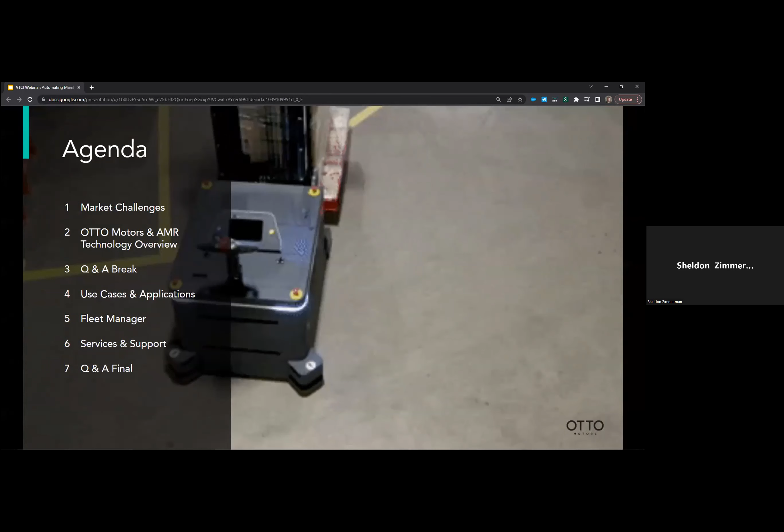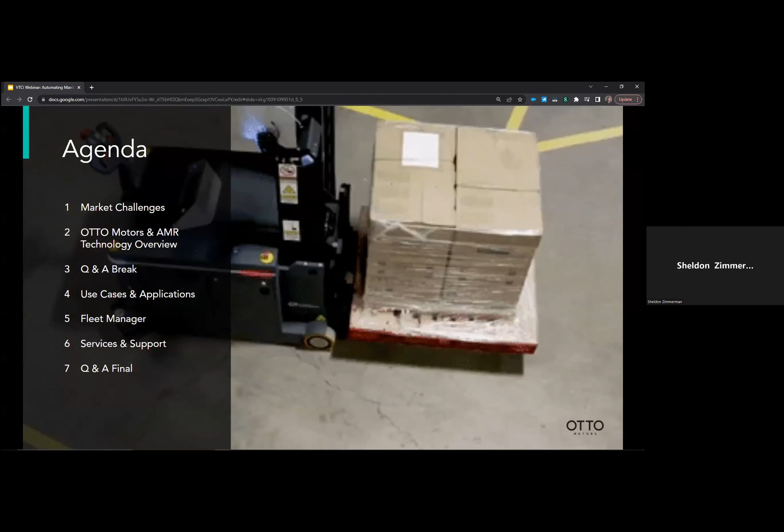Just a quick overview of the agenda we want to go through for the presentation. We want to provide an overview of the market challenges that the heavy equipment and vehicle manufacturers of Manitoba are facing, so we'll start off with that. We then dive into the OTTO Motors technology offering and give you a thorough overview of our AMRs, our autonomous mobile robots. We'll then break for a Q&A period with Jay. Following that first Q&A, we're going to showcase some real-life applications of our AMRs at work with end users in the manufacturing space. We'll provide an overview of the software that powers our robots, known as Fleet Manager, and we want to dive into the power of that software offering. Next, we'll go over the service and support offerings we offer for your deployments. And then again, we'll do a final Q&A period.

So just starting to talk about the market challenges. Canada's labor shortage problem is evident. When you look at heavy vehicle manufacturing in Manitoba, it represents 11% and accounts for $1.5 billion in annual exports, so the industry is strong. However, there are labor shortages, late fees, and delayed capital investments. In fact, Canadian Manufacturers and Exporters, CME, has put a number on worker shortages of $13 billion. That's how much the current labor shortages are costing the industry across the country in the last year alone. The CME came to that total extrapolating from a recent survey of its members on labor force issues. It comes from lost orders because companies don't have the workforce capacity to take on more work.

And from costs that they have to pay for expediting to deliver when things show up late. Jill Nags, an official with CME Manitoba, said there's no reason to think Manitoba manufacturers are not bearing a proportionate share of that $13 billion that's being left on the table in the past year. It's been the number one concern for Manitoba members for a few years now, she said.

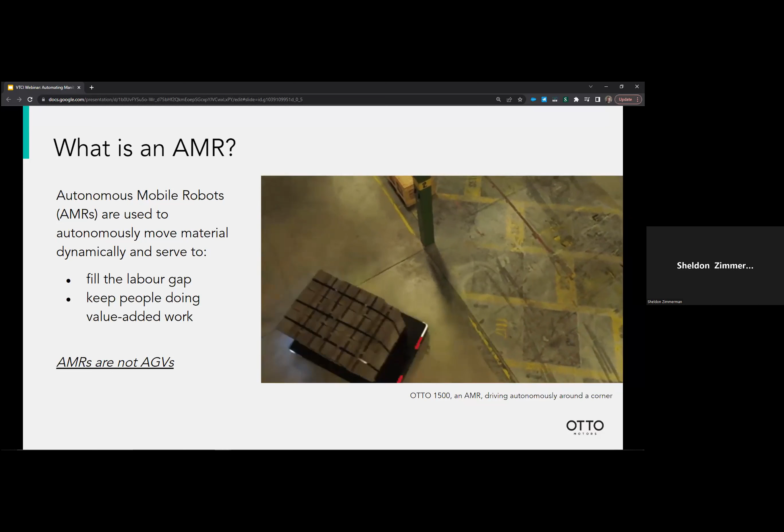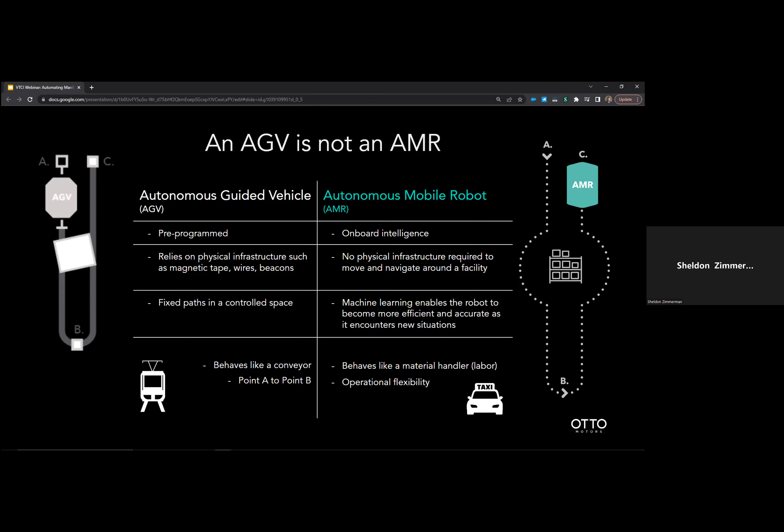So we, as mentioned, are a Canadian company. We're a leading provider of autonomous mobile robots.

Recently, it was announced that the company had been named as a member of Team True North. Team True North is a proactive data-based initiative by Communitech. It serves to identify the country's highest potential tech companies and strengthen the entire Canadian tech ecosystem. Companies recognized as part of Team True North represent the top 1% of Canada's highest performing global private companies.

Just a quick quote from our CEO and co-founder, Matt Rendall, who you'll hear from later in the presentation: 'We're honored to be named to Team True North and to be the only robotics company on the list for 2022. In the past few years, we've seen automation transition from a tactical initiative to a strategic one. This recognition by Communitech speaks to the growing importance of automation. We're proud to be among this year's winners and help keep the economic wheels turning in Canada and around the world.'

So OTTO is quickly becoming one of the largest indoor logistics operators in the world. If you think about a typical forklift driver with, say, 20 years of experience, they have approximately 42,000 hours of driving experience on your forklift. Each of our AMRs has the collective experience of 4 million hours in a production environment in mission critical operations. So every one of our AMRs benefits from the experience of every other AMR out in the world.

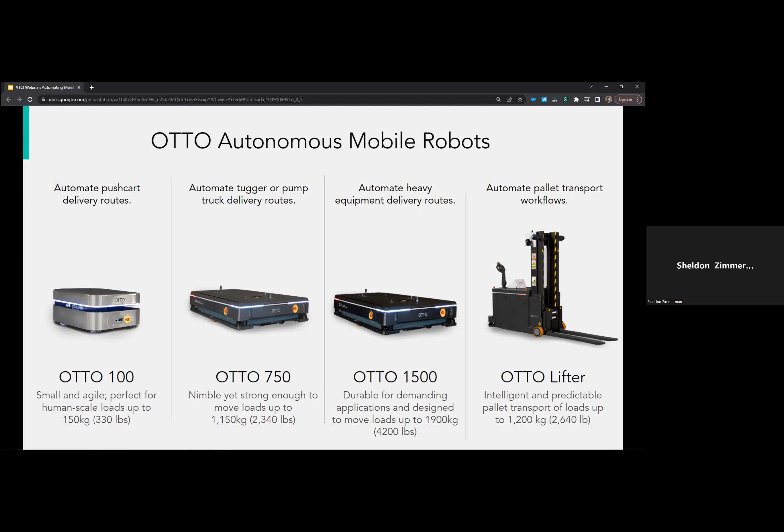Just to key in on the forklift itself, we consider it the smartest autonomous forklift in the industry. It has intelligent pallet detection for skewed, off-centered pallets and stretch wrap covered entry notches.

It has one-touch autonomous lane clearing, which I'll show you in a video in a second. It utilizes what we call adaptive field set technology, which maximizes your speed while maintaining safety in the facility. Of course, it utilizes the same single fleet management system that all of our vehicles use, so they all run on one software platform, and it continuously remaps zones for dynamic environments.

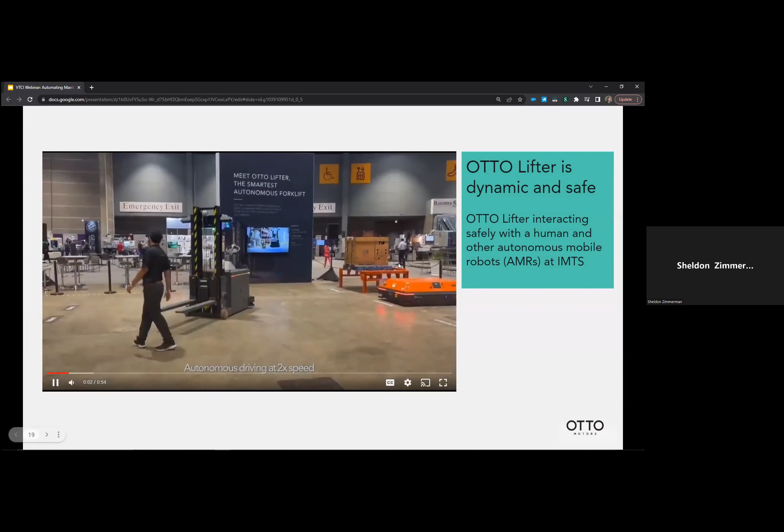This is an example. I'm just going to let it play and narrate it. There's no audio to it. This is Omar, at the IMTS show we were at recently in September of 2022 in Chicago.

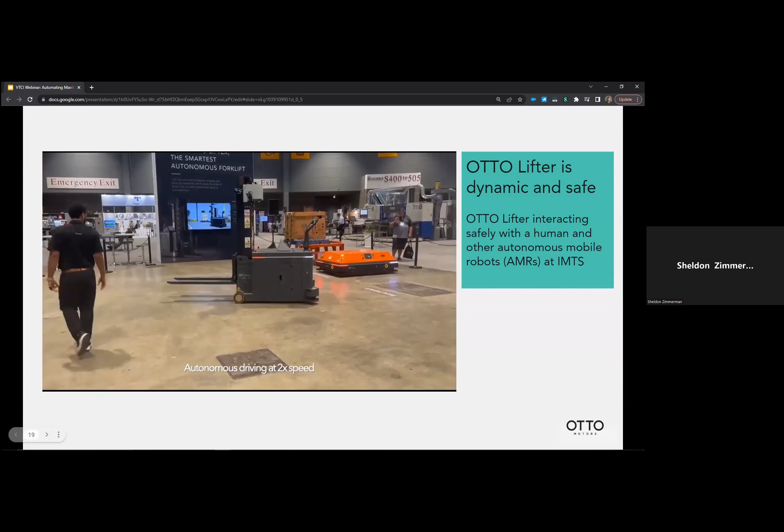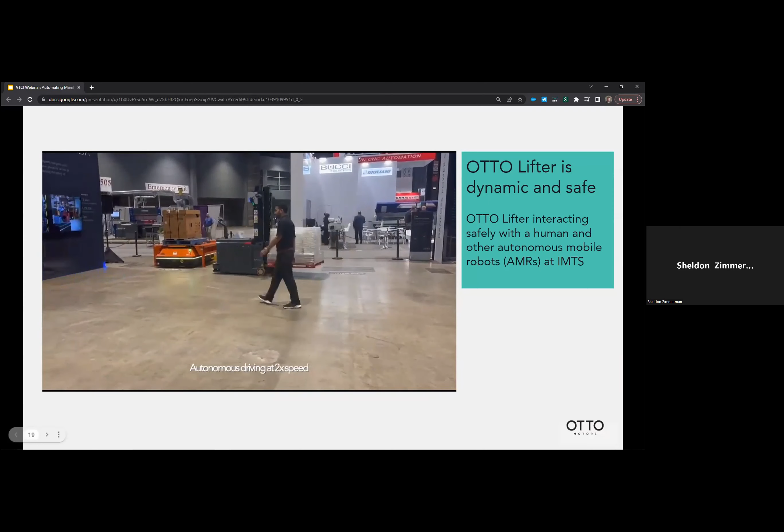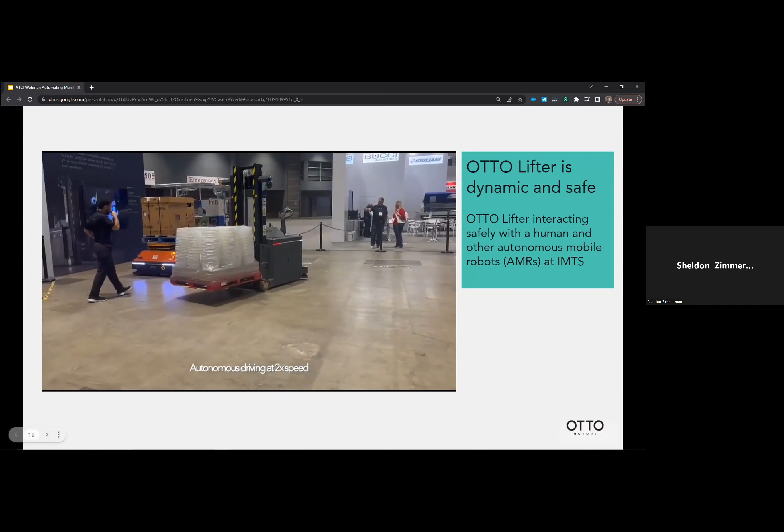This is showing the safety and the ease and comfort of Omar as he walks around the robots and amongst the fleet. You'll see an interaction between the lifter and our OTTO 1500, which is in the background there. This really showcases how comfortable it is to be around these robots and some of the re-navigation the robots do to get around obstacles or people in your facility. In a second, he's going to walk right through the middle, between the two vehicles, which are always monitoring the obstacles in their way and trying to find an efficient method to get around them.

I think that one's powerful. I want to talk a little bit about it, because we set up these trade shows in 2 days, and we feel comfortable enough with our technology to bring it into a trade show, set it up on the floor, and have our people, or even people within the trade show, come inside the fence lines, walk around the technology, and be safe. I think that speaks to the trust we have in our product, putting it out there on the floor within a short period of time.

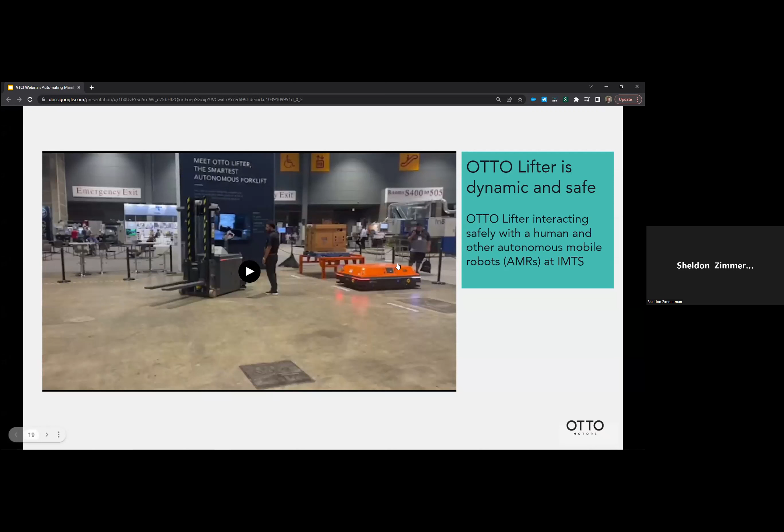Awesome, awesome. So we have one question that came up, feel free to submit more. Joshua asks: you claim the forklift robot will continue to do its task until it's physically constrained from doing so. How does this affect the collaborative ability of working in and around these robots? How can you ensure the robot will not collide with plant workers? I think that video you just showed illustrated that well, but Jay, you had a couple of comments you wanted to make.

Yeah, absolutely. That couldn't have been timed better, the question coming on the last slide before Q&A. I think that video is important because anything I tell you is going to sound reasonable, but the reason you should believe me is because we did video, right? There were 100,000 people at that show, and if anything had gone wrong it would have been quite reputationally damaging. So that shows the trust that we have, and the trust that Omar had. You look at the smile on his face as he was doing what he was doing.

But as for the technology, how we get it done, basically the key ingredient is a LiDAR, a laser scanner essentially that works out on a plane. It sprays laser all over, finds out where things are, and the closer it gets to things, it either slows down or stops. So if it sees something far in the distance, it might go fast. If it sees it closer, it'll slow down, and if it gets too close, it stops.

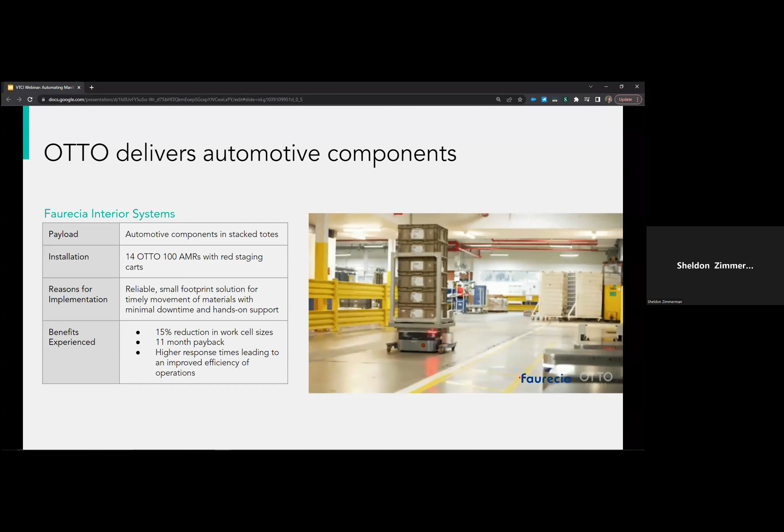So the first is bringing materials to and from people. This is a real life example of a tier 1 automotive supplier in Michigan, Faurecia. You may have heard of them. They wanted to move automotive components in stacked totes.

You can see a quick GIF file of that movement, but I'm going to show you a more comprehensive case study video we did with them. They took on 14 OTTO 100 AMRs with staging carts. It says red, they're actually gray.

What they were looking for was a reliable, small footprint solution for the timely movement of their materials, with minimal downtime and minimal hands-on support. What they experienced, and what they'll tell you in the video, is they were able to reduce the work cell sizes, gaining back about 15% of floor space in their facility. They achieved an 11-month ROI on the deployment, and higher response times, leading to improved efficiency for their operations.

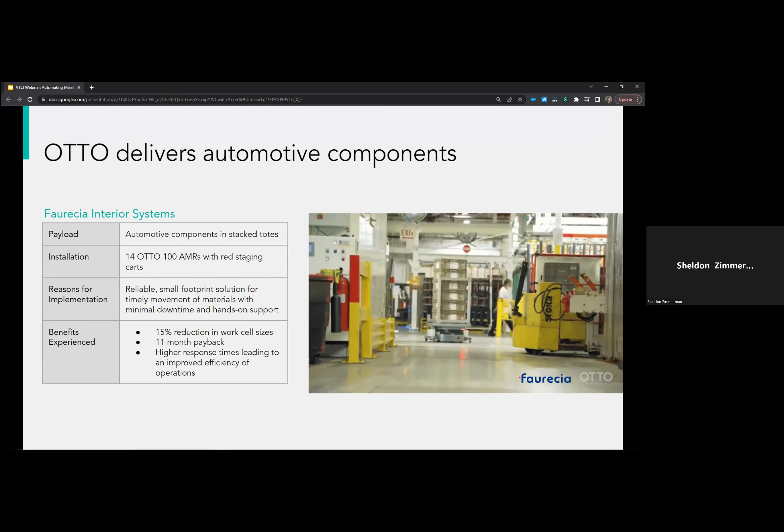So I'm going to let the video play. Again, it's Faurecia in Michigan, and they can tell the story better than I can.

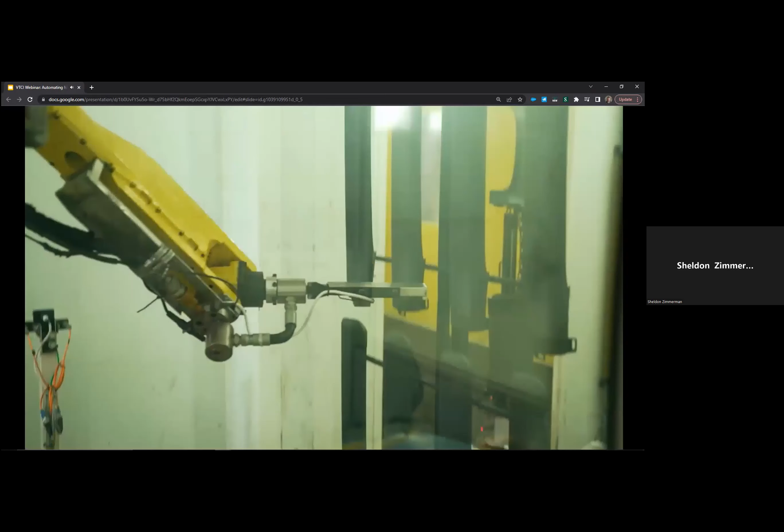Faurecia is a leader in automation and cutting-edge technology. We do automotive components, instrument panels, consoles, door panels for Ford, GM, and Chrysler, also BMW, Rivian, and Volvo.

With the COVID restrictions going on and people having problems getting to work, we're trying to automate some of the processes so we can reduce our people workload and function as a plant even in these trying times. We have 8 OTTO 100s with gray carts, and we will be receiving 4 more in the future.

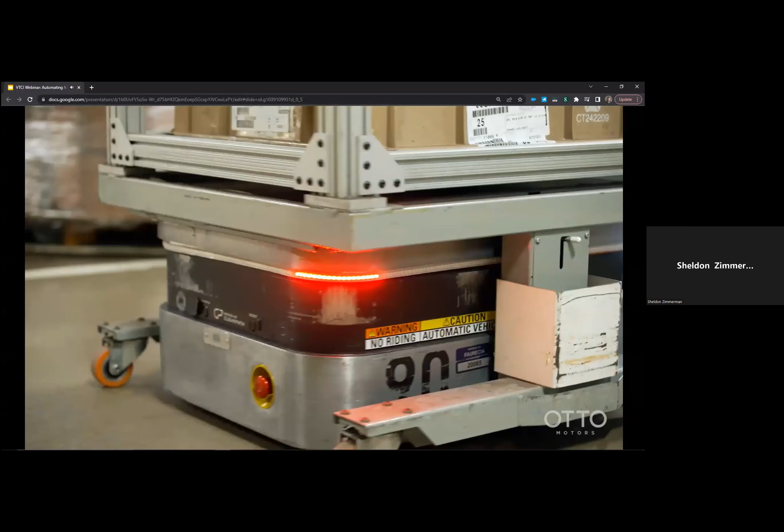It's happened once or twice here at Faurecia where the OTTO has accidentally been hit by a tugger or a high-low. The OTTOs are so robust that if it does take a hit from a high-low or a tugger, it is quick to reroute and complete the mission.

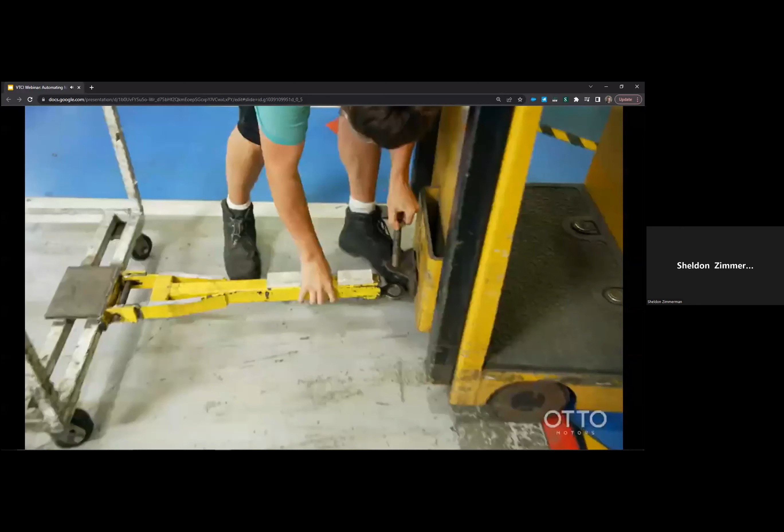One of the basic problems we're trying to solve is the material movement between the work cell and the warehouse. The OTTO fit exactly what we needed it to do, where it can pick its own path, where it doesn't need a magnetic strip. I was in charge of bringing OTTOs into the plant. I spent countless hours looking for someone to meet the footprint required by our corporate personnel, and OTTO stood out.

Overall, it just needed to be a self-sufficient system. OTTO allows us to reduce our tugger drivers and high-low drivers, utilizing the manpower in a much more efficient way. The role the Autos play: once the operator is done stacking their totes, they turn around, call the OTTO with the tablet. The OTTO will then deliver the parts from Tech Bay over to our shipping warehouse, dropping off a gray cart and picking up an empty gray cart, then bringing it back up to Tech Bay.

The OTTOs have safety features that allow them to coexist with both a tugger, an operator, and people crossing its path. We've been running the OTTOs for about a year and a half. We've had zero safety incidents. We have a pretty big facility, so I can't visually see all 8 OTTOs at all times.

In Fleet Manager, I'm able to see where the OTTO is, how long it's taking, but also things change in our plant all the time. I'm able to assist with remapping certain areas, put in an eraser zone, put in another zone, put in new routes. We wanted something that was totally flexible, and OTTO gave us that ability. In fact, we moved a couple of cells in the plant a couple weeks ago, and within 45 minutes we had a new parking lot and a new route for the OTTOs.

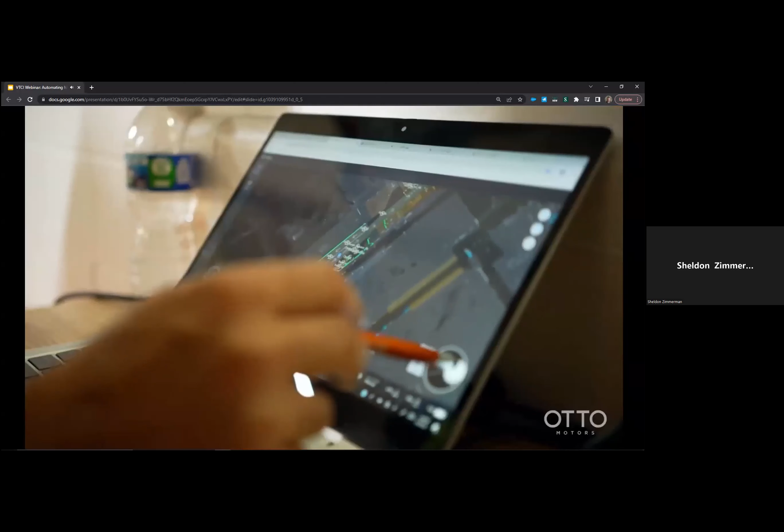We've run over 15,000 miles with the OTTO fleet over the last year, and they operate 24 hours a day, 7 days a week. They don't take breaks, nor do they show up late for work or get sick. We've only had very few downtime issues with the OTTO fleet itself. Our return on investment for the OTTOs is about 11 months. We can utilize our workforce in a much more efficient way.

The operators absolutely like the OTTOs, hands down. They actually prefer OTTOs to the old delivery way. It's really a no-brainer. We are expanding the fleet due to being noticed for efficiency gains. OTTO delivers safety, productivity, and efficiency at scale.

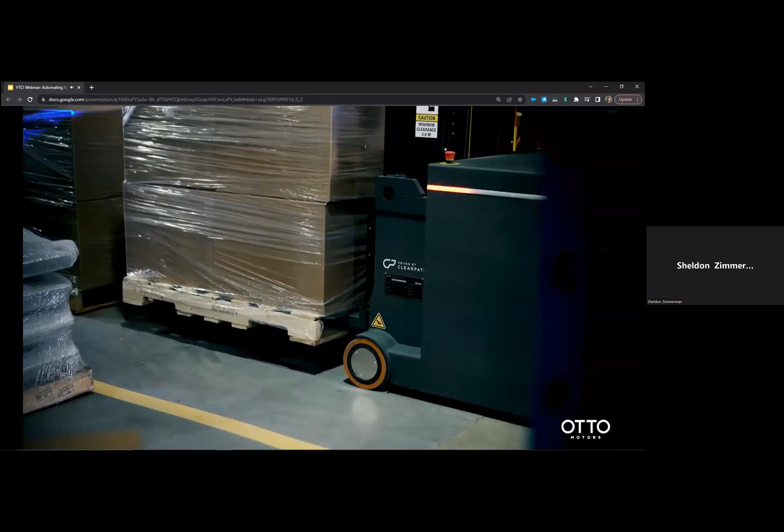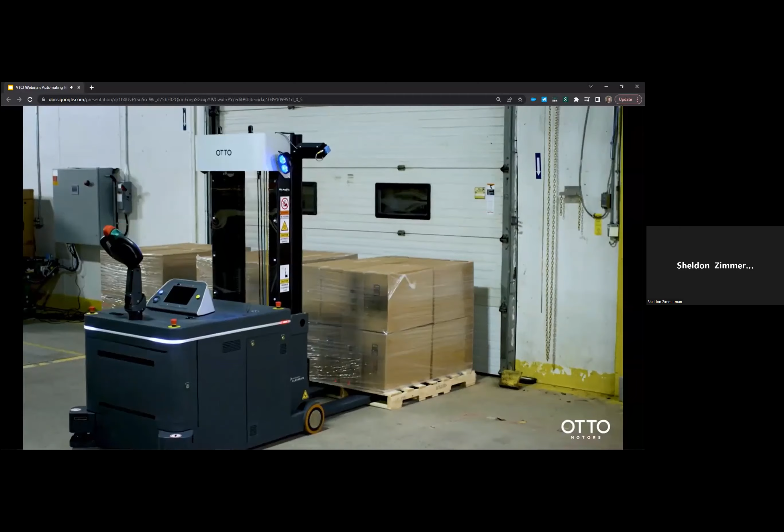Okay, so just moving on to the next type of material, we're going to look at bringing materials to and from racks and stands. The next couple of videos highlight our autonomous forklift, again known as OTTO Lifter. The first one highlights our ability to quickly and efficiently perform lane clearing. This next video is going to be stand-to-floor workflows, again with the lifter, just showcasing its capabilities.

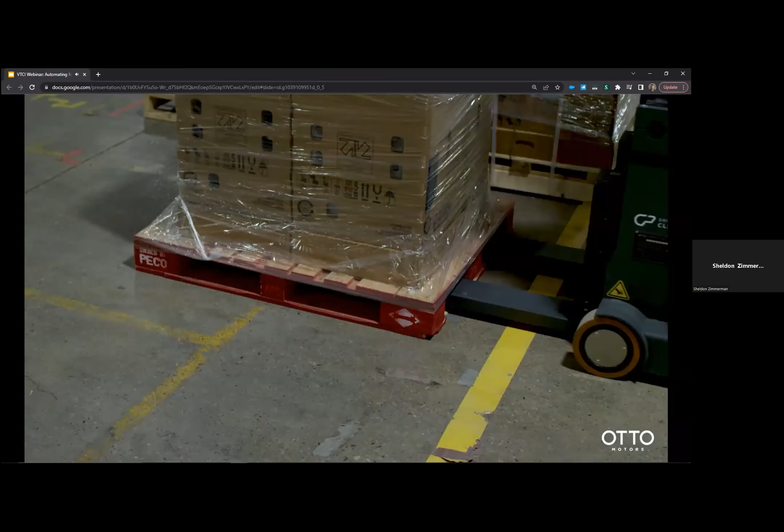So the next type of movement we're going to look at is bringing materials to and from automation equipment. This is linking up islands of automation within your facility.

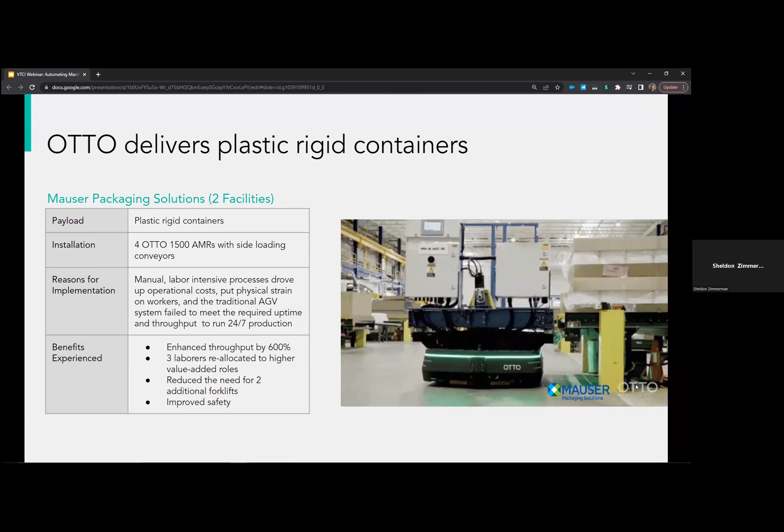First case study that we want to showcase is with Mauser Packaging. There are 2 facilities, one in Langley, British Columbia, and another in Oakville, Ontario. The payload that we were moving is rigid plastic containers. We installed 4 OTTO 1500s with side loading conveyors.

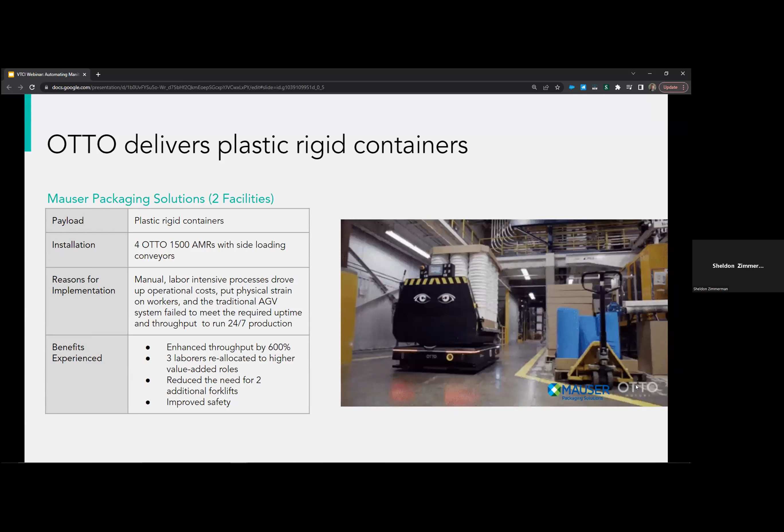The reasons they were looking to implement this: manual labor intensive processes drove up their operational costs, it put physical strain on their workers, and the traditional AGV system was failing to meet the required uptime and throughput to run their 24/7 operation. What they experienced was an efficiency throughput increase of 600%. They had 3 laborers reallocated to higher value-added roles, and they reduced the need for 2 additional forklifts, of course improving safety at the same time.

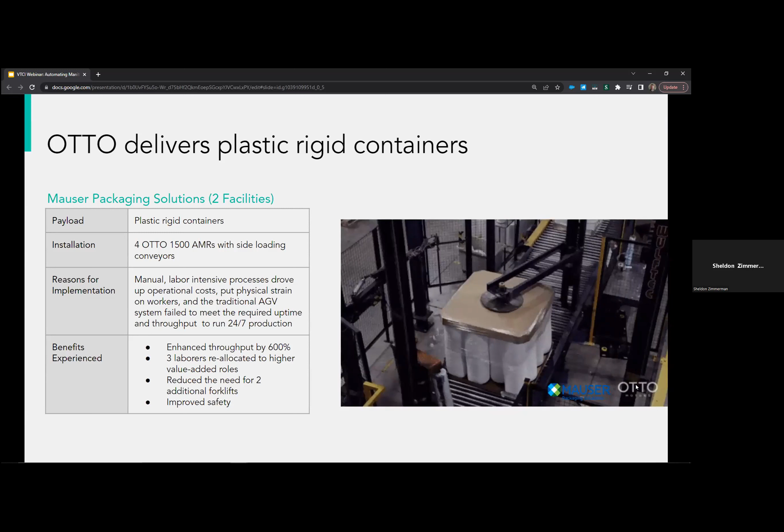So the next video is going to highlight that installation.

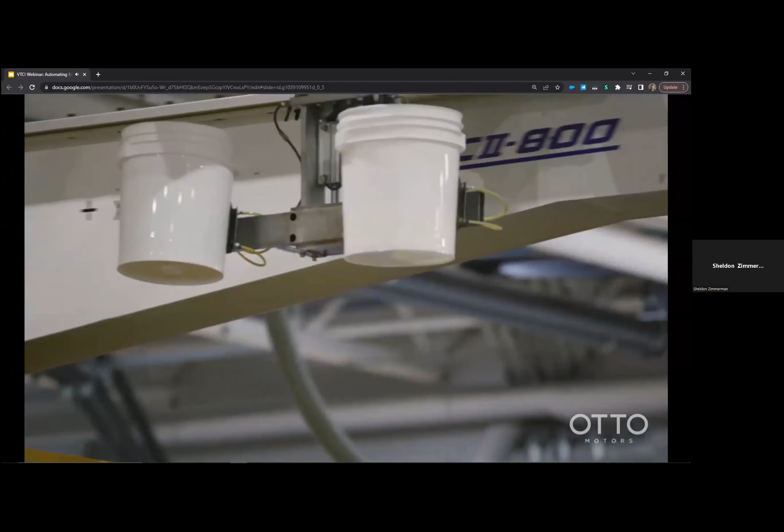Mauser values innovation because they want to be the leader in the plastics manufacturing industry. We manufacture pails and lids from 1 gallon to 13 gallon. We service a lot of different industries, like Stahlbush and Saputo, big customers that put a lot of food product into the pails.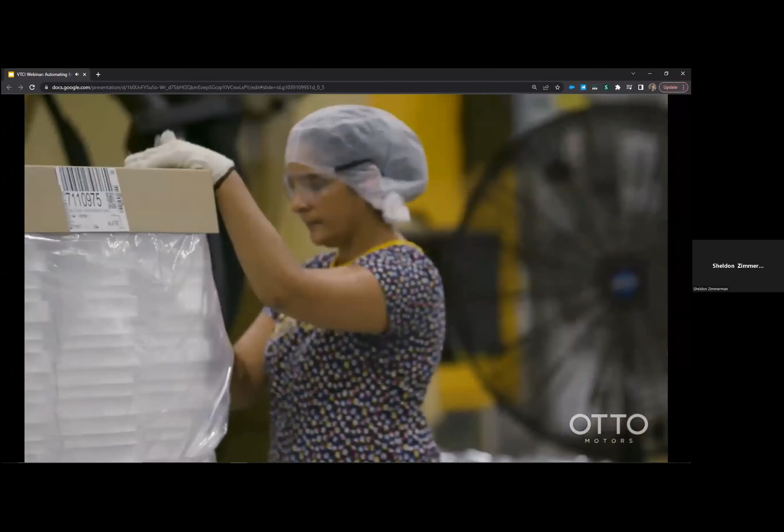This facility is about 206,000 square feet, and we have 140 people working right now. OTTO came into our mind because of the safety concerns that we had in the past. Finding people was very difficult because we were a 24/7 operation.

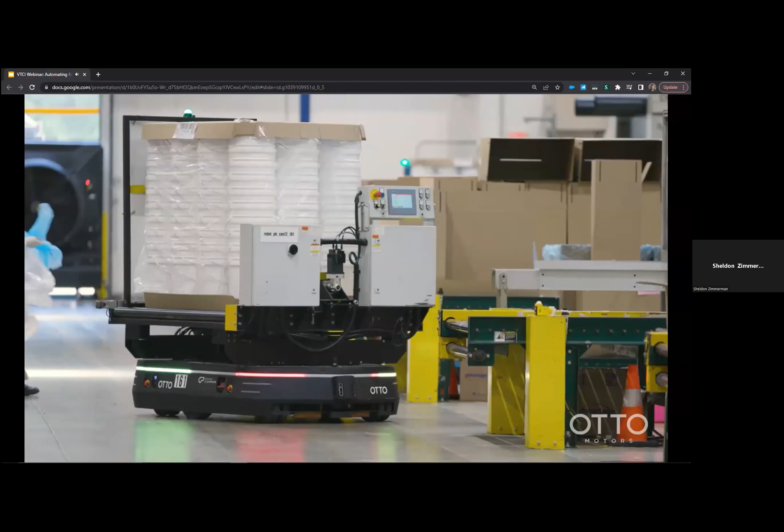When OTTO was first introduced to the Langley facility, it was the first step for us to get into something probably nobody's ever done before. The OTTO arrives to the station, connects with the pack station and transfers the package onto it, and then drives back to the drop-off station where it transfers onto the wrapper-strapper line.

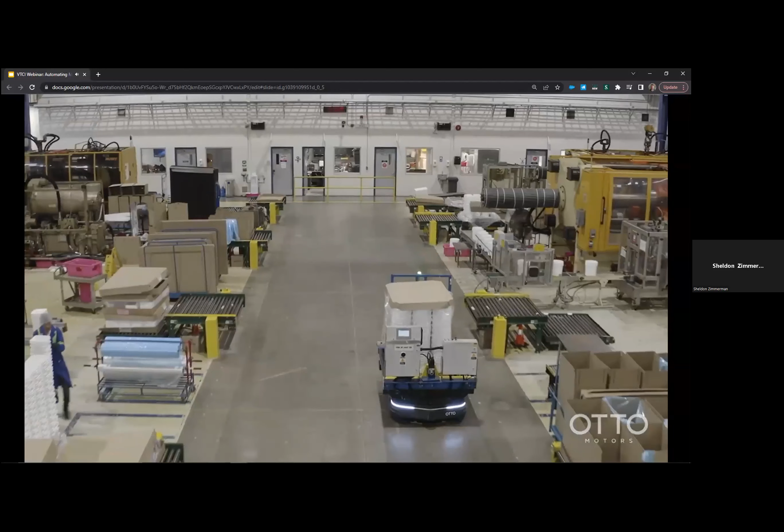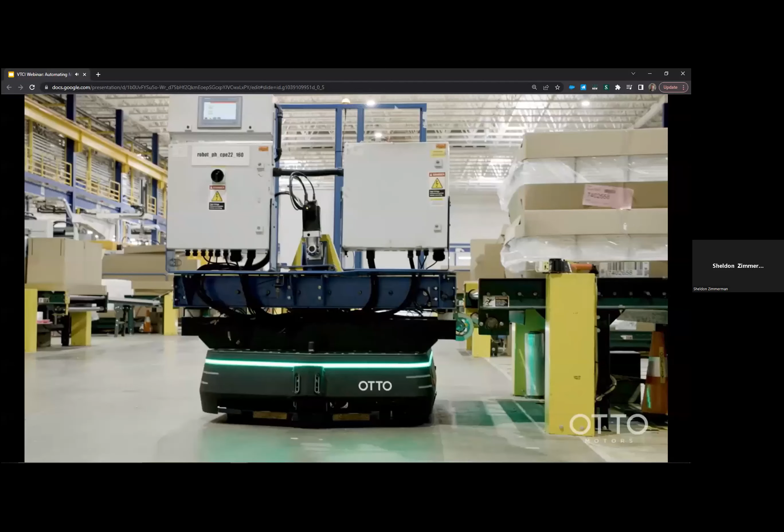When we introduced the OTTOs, we didn't have to worry about people getting hurt. For the last few years, it became apparent to us how important that was. The job OTTO's doing right now is basically the work of 3 people, plus at least 2 more forklifts. It definitely helps us out to have that money spent somewhere else.

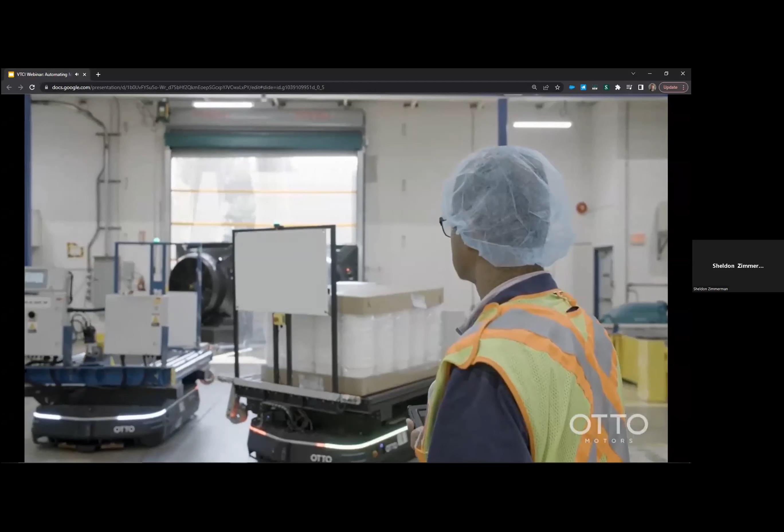I was pleasantly surprised working with the OTTOs. Such an easy system to work with. Myself, I'm not that technical minded and don't work with computers too much, but I found that this system was easy to understand and navigate through.

Because the units work so well here in Langley, they decided to expand that and bring the OTTO units into our Oakville plant in 2021.

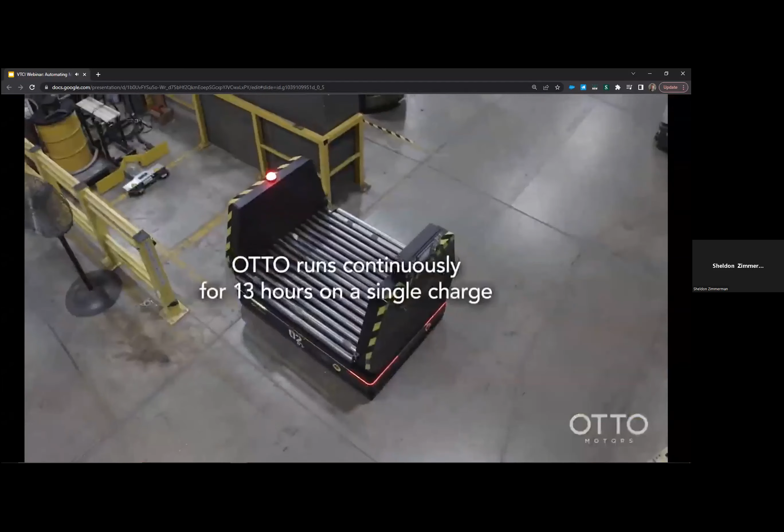OTTO delivers safety, reliability, and productivity at Mauser, 24/7.

Next case study I wanted to showcase for you all was more of a heavy payload application. This one is Sunview patio doors. You can see on the right the video file showing us moving 8 patio doors. Again, the footprint of the payload can be larger than the vehicle itself. It doesn't have to stay within the footprint. This is an example of where Jay had mentioned earlier that we can set up custom safety field sets so that it then virtually sees itself as larger than it actually is.

This was a single OTTO 1500 AMR integrated into their facility in Mississauga, Ontario with an integrated lift. They needed a flexible solution that would help transform their production to a lean manufacturing model, and it was necessary to increase safety and keep up with their evolving market, which required lower price points, faster delivery times, and more customizable products.

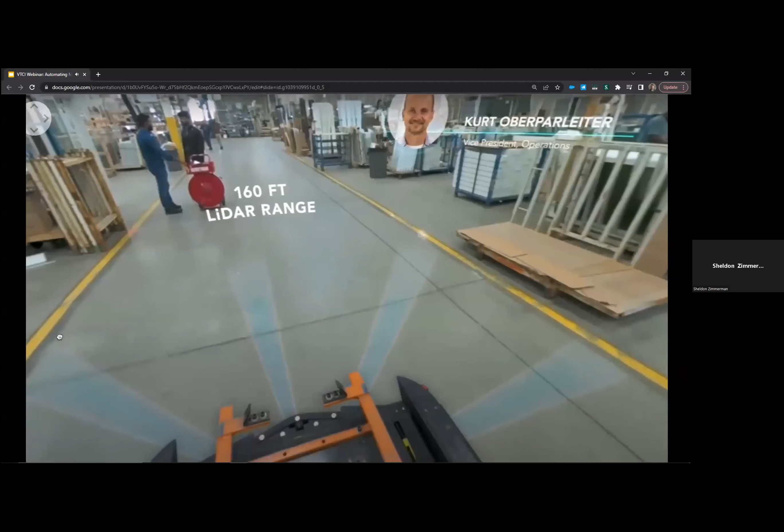I'm Kurt Oberparleiter, the VP of Operations. As OTTO drives, it uses LiDAR sensors and stereo cameras to map its surroundings, detect how far away objects are, and replan paths so it can safely navigate around obstacles autonomously.

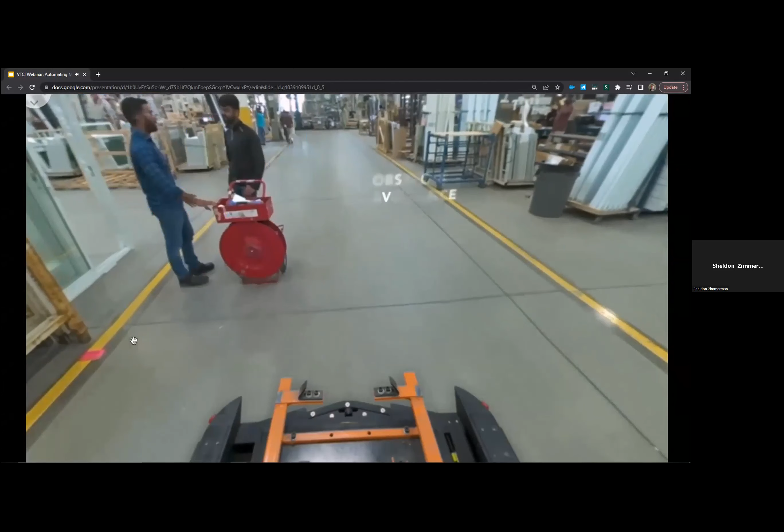As you can see, Maunick and Harris are blocking OTTO's path. Let's watch how OTTO navigates around them. Even if Maunick jumped right in front of OTTO, I have no concerns about a collision because OTTO is smart enough to react, just like a human would in the same situation.

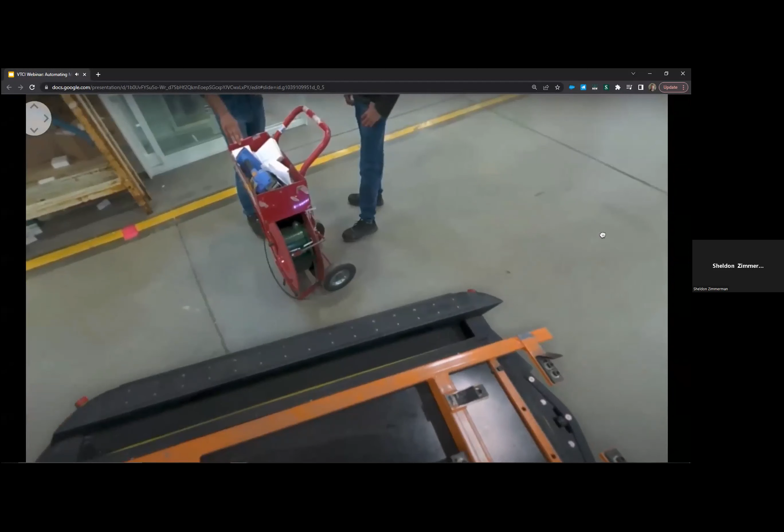Millions of laser beams are projected 160 feet in front of OTTO, which form a detailed image of the environment in which it is driving. This is one of the ways OTTO ensures it will continue to reach its destination in the most efficient manner, without the need for magnetic strips or other infrastructure to guide it.

So just a quick video to highlight the safety improvements and safety aspects that Sunview was... oh, that was not what I meant to do, that they were looking for. Goes to the current slide. Good, apologize for that.

Okay, so we're on to the next part of the presentation, which really focuses on our OTTO Fleet Manager offering and our software. OTTO Fleet Manager is our enterprise scale AMR fleet management software. It's meant to manage your fleet of OTTO AMRs, and it's the smartest and most scalable fleet management software for your material movement in the facility.

It applies custom traffic rules to your facility, and lets Fleet Manager enforce them across your fleet, while a built-in job scheduler automatically assigns jobs in a way that maximizes robot utilization and material throughput always. It's flexible enough to easily integrate with your existing mission-critical factory tools and systems, and PLC ready to collaborate with your smart factory equipment. OTTO Fleet Manager is designed to help you get started with material handling automation or go full enterprise scale across your entire operation.

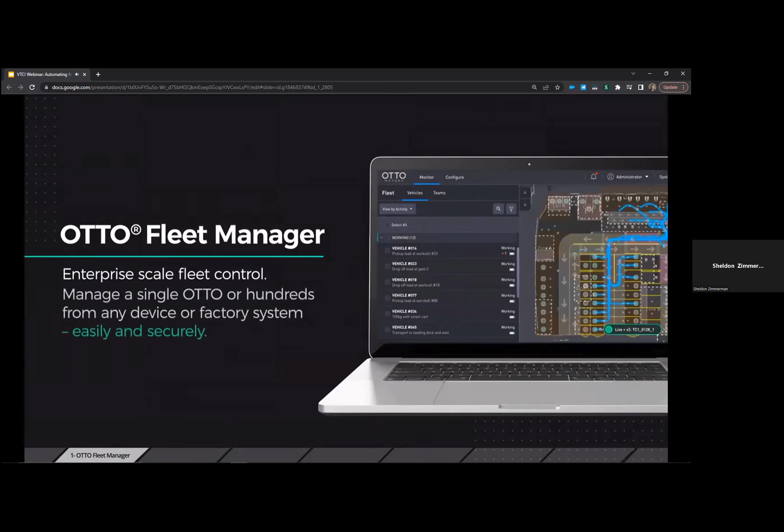It allows you to scale up from managing a single OTTO in your first implementation all the way up to hundreds of vehicles, all from a single device or a single factory control system. This can all be done easily and securely. Things like fleet configuration and administration, job dispatch and scheduling, AMR fleet monitoring and reporting are all applications that exist inside of our fleet manager.

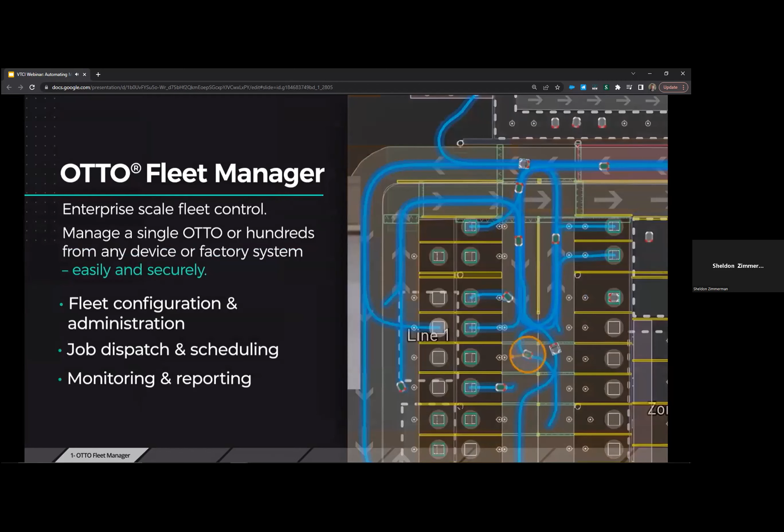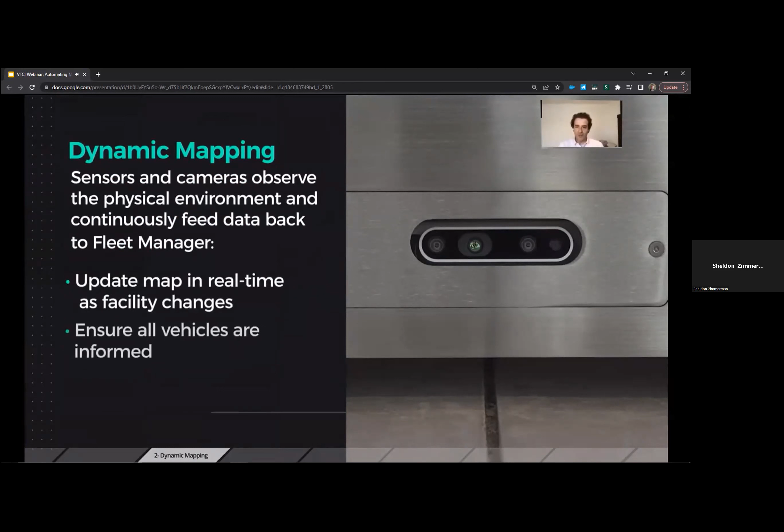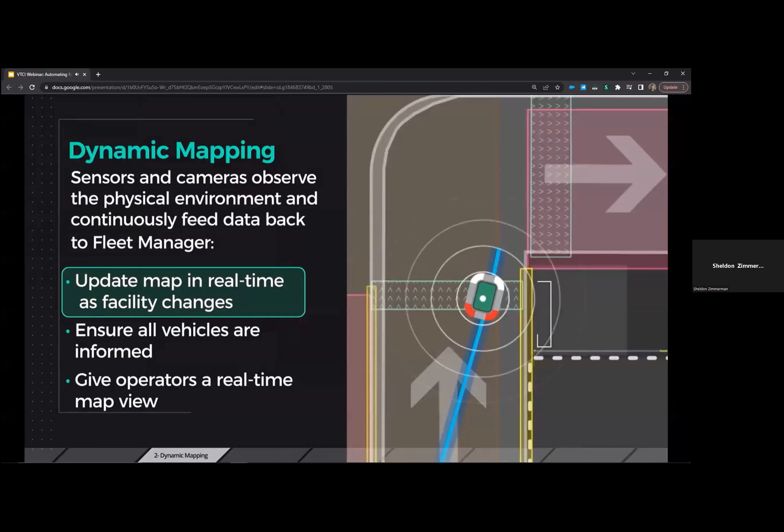Second, AMRs fundamentally have the ability to dynamically map and path plan in their environments. Using onboard sensors such as cameras and LiDARs, every OTTO AMR is able to collect information in real time of its surroundings and use that information to make real-time changes to the facility map, as well as make dynamic decisions about how the path should be altered to ensure the right part gets to the right place at the right time, every time.

When these types of events occur, this information is then distributed to all vehicles to ensure all vehicles are informed. And then finally, all of this is updated in real time to a centralized map view for all operators to get a comprehensive view of how their operation is unfolding.

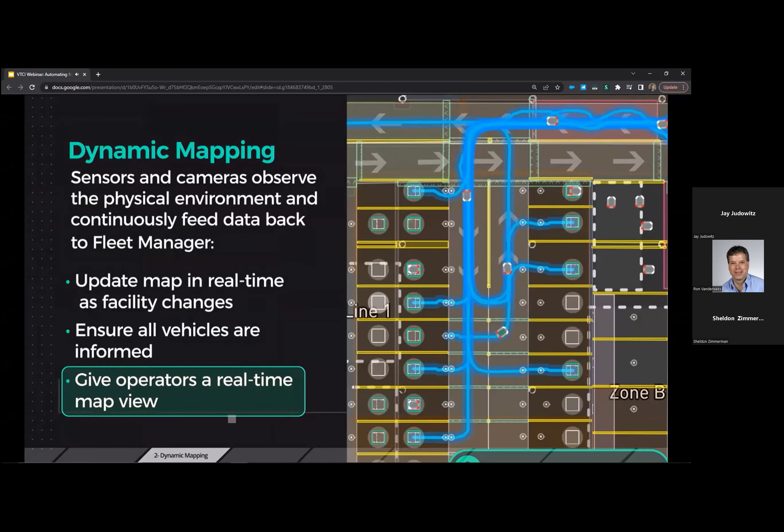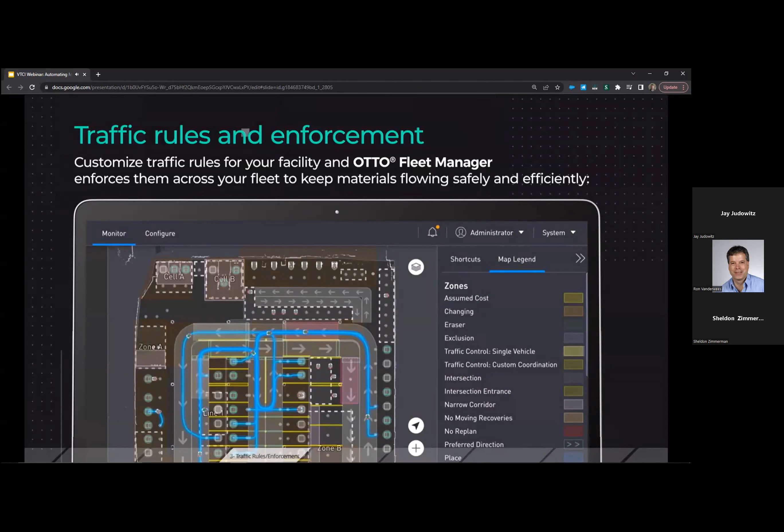Third, a successful AMR fleet requires smooth traffic flow and traffic enforcement, and that's one of the primary responsibilities of our fleet manager. We have tools that allow you to customize traffic rules and patterns to ensure efficiency inside of your fleet. The fleet manager enforces these rules to help ensure that your materials keep flowing smoothly, safely, and efficiently.

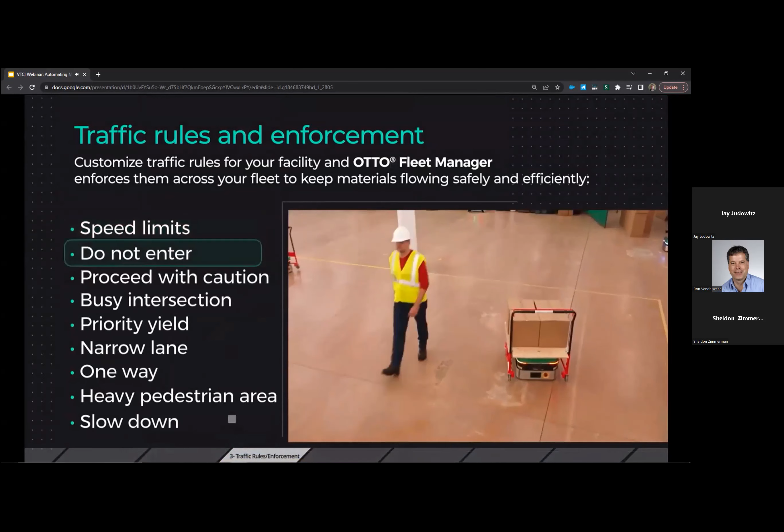We have zone capabilities like speed limits, do not enter, proceed with caution, intersections, priority yield, narrow lanes, one-way traffic, and even defining pedestrian heavy areas. Each of these rules sets a specific behavior expected of your AMR fleet, and these rules are often already codified in your operation and expected of fork truck drivers or other vehicle drivers, as well as your pedestrians. So we've simply created a simple, easy to use way to codify this inside of Fleet Manager and expect the same behaviors of your AMR fleet.

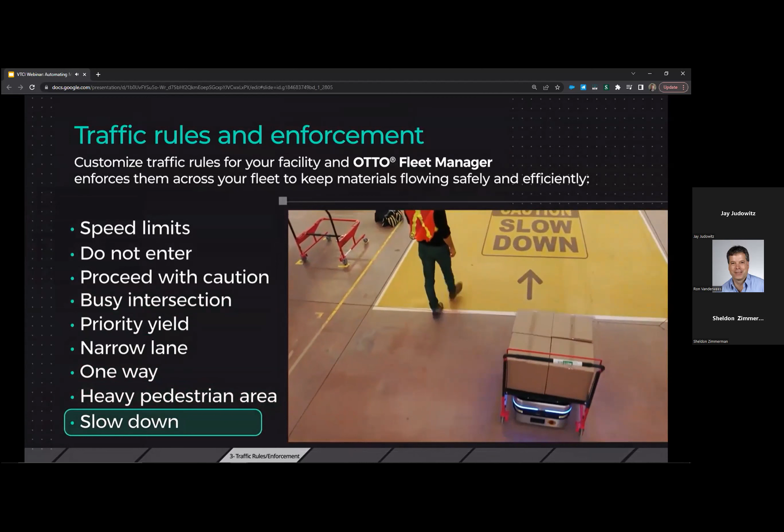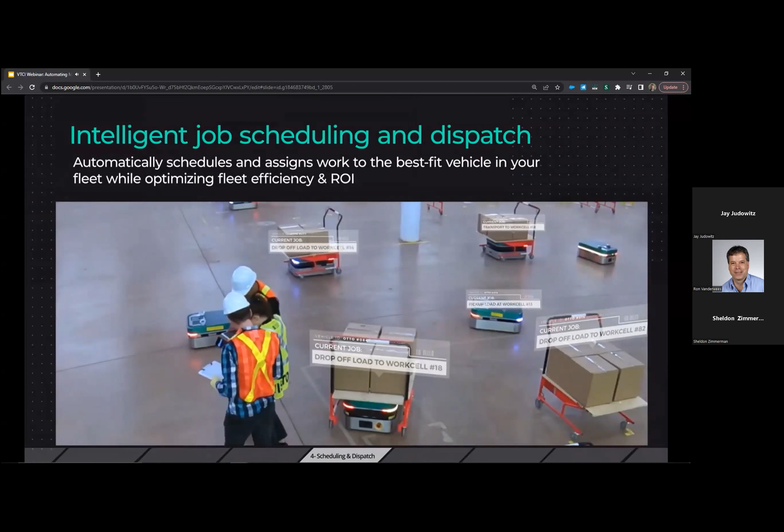Fourth, our scheduling and dispatch applications are critical in ensuring the right part gets to the right place at the right time every time. Our scheduling and dispatch capabilities automatically schedule and dispatch the right work to the best fit vehicle for the job. In doing so, at the fleet level and over a long period of time, this ensures maximum efficiency and ROI of your AMR network.

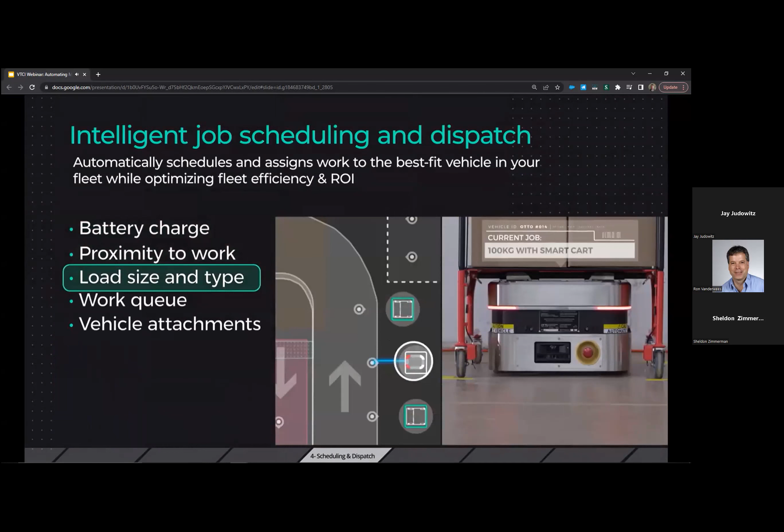Things like battery charge, proximity to work that needs to be done, what needs to be picked up, how big is it, how far does it need to travel, what does the queue of work look like behind it, as well as what are the attachments for interfacing on board each of the respective vehicles in the fleet, are all important inputs into the scheduling algorithms that our fleet manager utilizes.

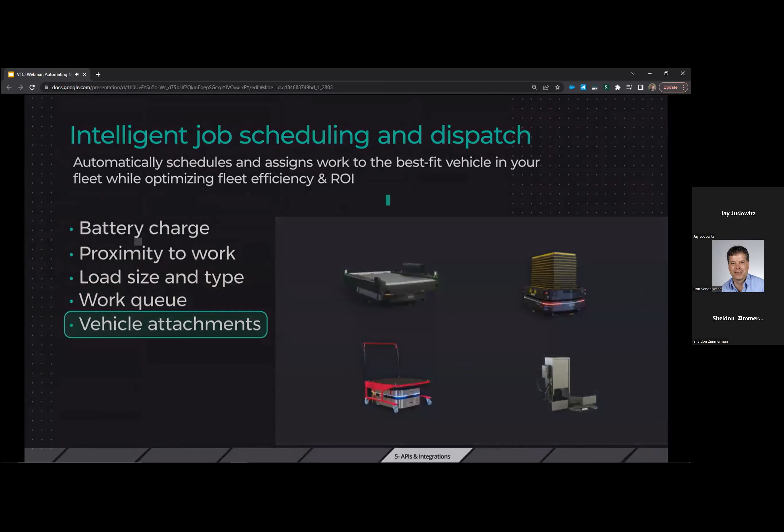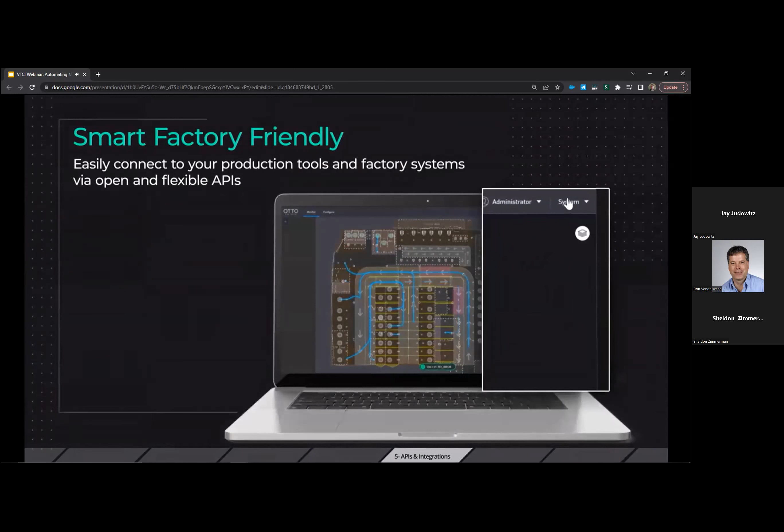Fifth, our fleet manager offers a robust set of APIs to ensure factory connectivity and integration, so you can streamline processes upstream and downstream from your AMR fleet. Your ERP integration allows you to seamlessly request actions of your OTTO fleet from supervisory systems like a warehouse management system or a manufacturing execution system. We also offer an industrial API via OPC-UA protocols, which allow for PLC network integration so that an IO event on the factory floor can trigger a job, and you can have safety interlocks between your OTTO fleet and your factory side automation. Our fleet manager has a REST API and a WebSocket API for WMS and ERP integration.

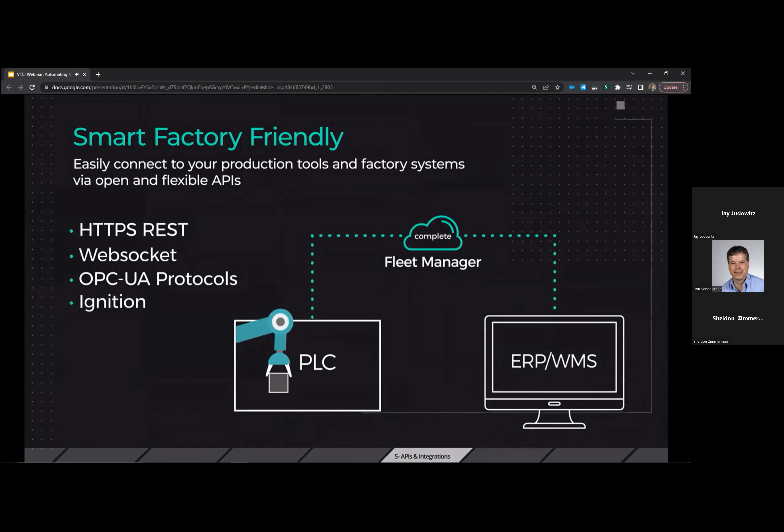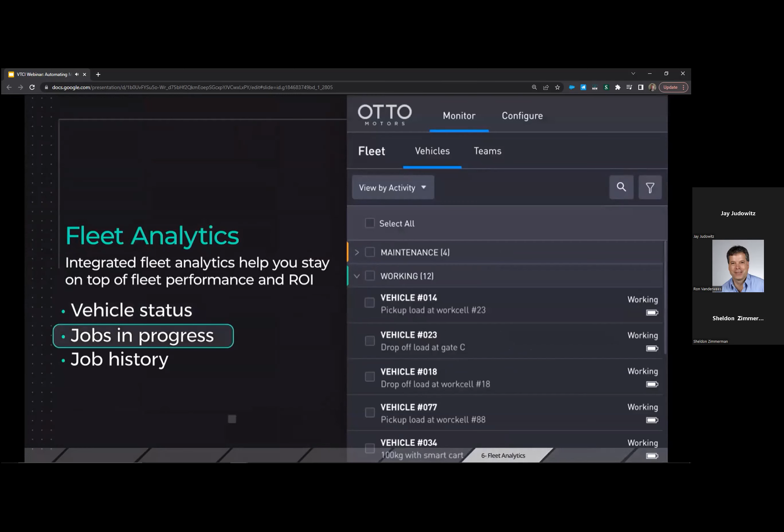Sixth, our fleet analytics help ensure OTTOs are performing productively and improving over time. We want to enable you to achieve top performance of your fleet. Achieving peak performance requires a deep understanding of vehicle status, jobs in progress, and job history as a few quick examples. Our analytics capabilities are really important for process engineers who seek to continuously improve an operation over time. And finally, seventh, smart notifications is an application inside of Fleet Manager to ensure that communications happen the moment a critical event occurs.

This allows us to keep mission critical processes moving flawlessly. In the event of an issue, users can be notified instantly and enable faster troubleshooting, not only through notification, but also with event logs and playback, all in pursuit of minimizing the time to resolution of an issue.

Our notification system allows users to configure critical events such as takt time, fleet efficiency, distance traveled, or job failures, as well as what distribution method and what time elapsed is permitted before an escalation occurs. Once configured, OTTO will notify you instantly via a mobile text message, an email, and/or a Slack message, as well as an ability to integrate into other critical communication tools that your business relies upon.

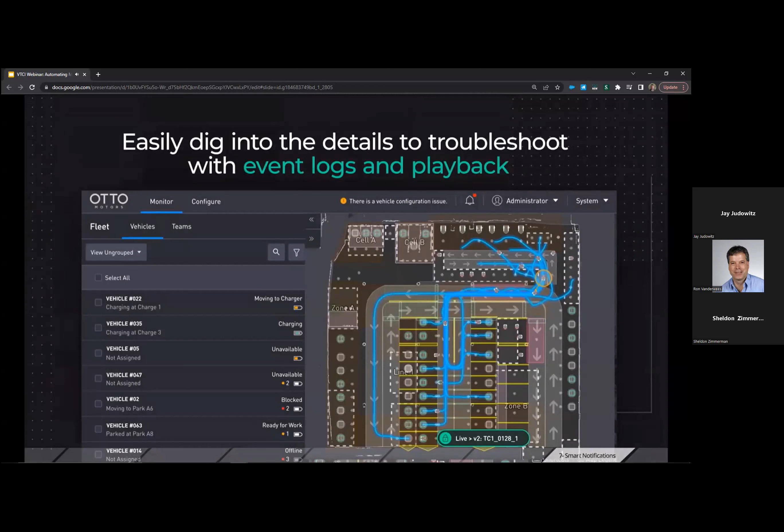Our event log and playback capabilities allow our users to easily dig into the details to troubleshoot issues and come to a solution faster. We also offer the ability to quickly and easily create snapshots of these events and communicate them to our technical support team so that we can help participate in an expeditious resolution of the event.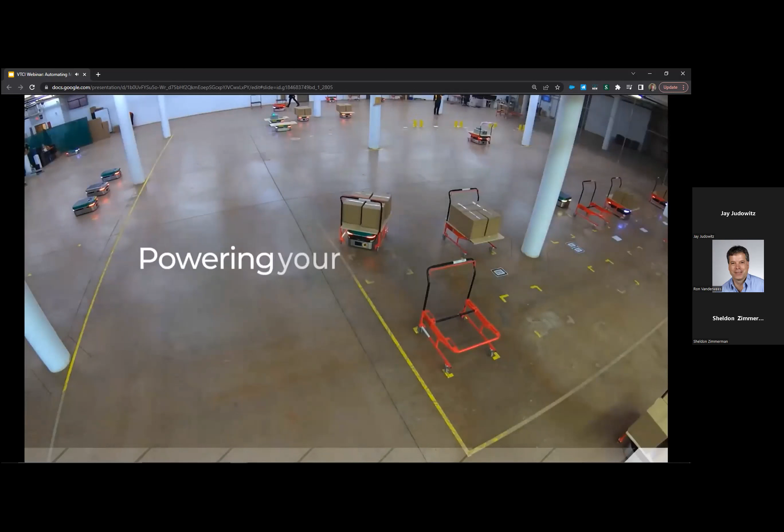We offer Fleet Manager in two variations. First, on-site, on-premise, hosted inside of your existing servers, or in the cloud for access anywhere. All in all, we make powering your smart factory and achieving your goal of lights-out manufacturing a reality sooner.

He gives a real good overview of the power of Fleet Manager and all of the options that it brings in.

One of them is mentioned kind of at the back end of that presentation, and that is data analytics. Data analytics are critical to your manufacturing operations because they can help you to improve your efficiency and productivity and even your safety over time.

I was saying the other day, gone are the days of grabbing a lawn chair and a stopwatch and sitting out on the production floor trying to gather up data and takt times, hitting the stop button at the wrong time and hitting reset. Now you can gather all of that within this platform and really dive down and drill into the areas of the analytics that you want to focus on, so you can find out where are some of the bottlenecks in your facility. Is it specific to an area? Is it specific to a robot path? Really identify where those areas of concern are and improve them.

Just to mention as well, the data analytics come as a base package with your OTTO robot and fleet management software. So they're built into the package when they're delivered to your facility.

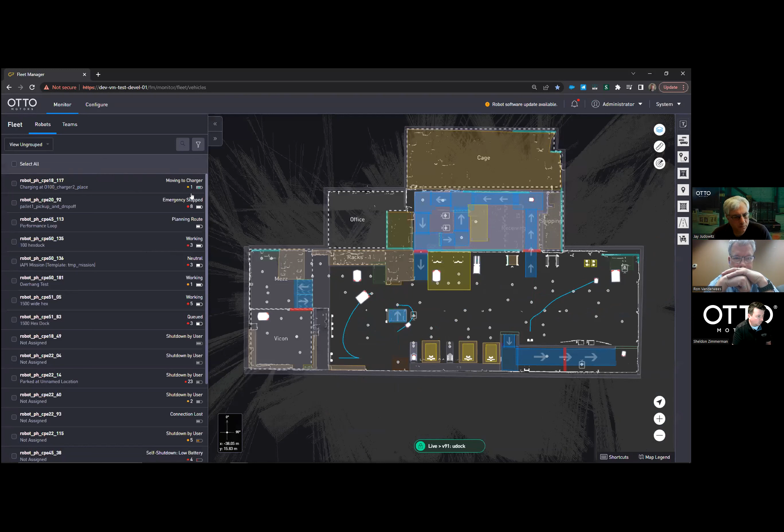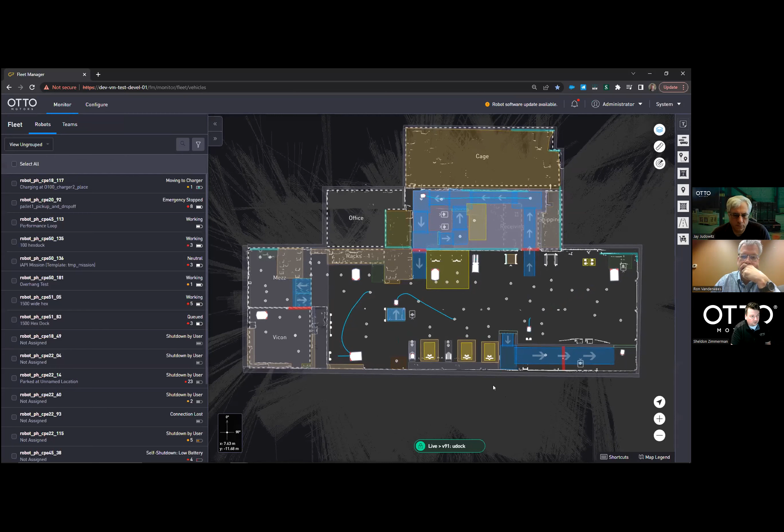Yeah, exactly. And here is just a listing of the robots in the facility. Certainly they don't have all the robots roaming around at once, but it does give you their charge rate and what they're currently doing - are they doing work, are they queued, are they shut down by the user. And when you go to Fleet Manager on the configure side, you're able to configure the facility, the schedules, and the workstations. So just a quick snapshot - again, this is a live view of what's happening in our facility in Kitchener-Waterloo.

Perfect. Jay, how long is your video? Oh, it's just - I'll just play a few seconds of it so you can see it. But I'm glad you noticed that, Ron. I was going to say Sheldon pulled it up at a fortuitous moment.

As that's a test floor, that's not optimized traffic, right? It's designed to have backups and traffic jams so that all the algorithms test out. So it was really cool that the 1500 came up at two 100s, and the 1500 just stopped. One of the 100s went all the way around, and the other one took a shorter path, but it totally unjammed itself, which was - we couldn't have picked a cooler moment for Sheldon to have opened that up. So sometimes you get lucky.

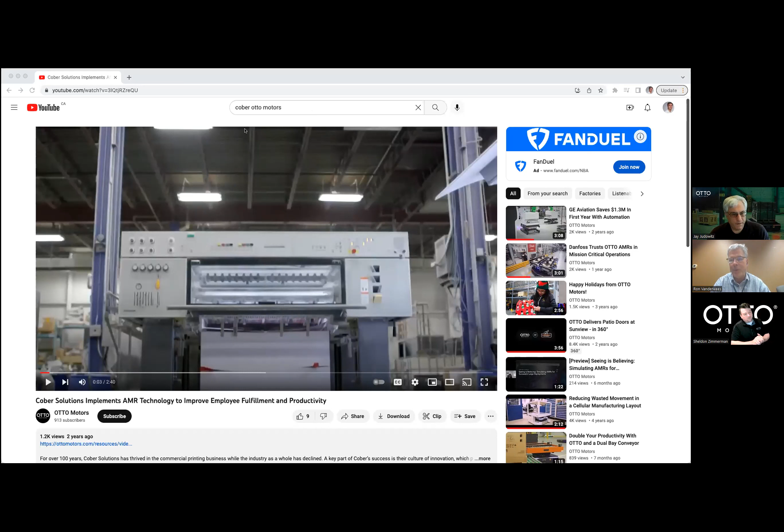So is this strictly manufacturing, or could any warehouse benefit from this? I would assume any warehouse, right? Yeah, absolutely. Factories, warehouses, distribution centers. The one thing is, if you're looking at the forklift, it is doing floor and machine and stand right now. It doesn't pull things off of racking, so that does limit some warehousing workflows. But what you're seeing can be used, as long as the environment is a good environment like the conditions I described, for any workflow.

Those robots really thrive in what we call horizontal movement in a building. You might have an ASRS system in a facility or warehouse doing the vertical movement of material. We really thrive in long distance material delivery along those horizontal routes.

And the last question, how would the AMR know not to drive through an overhead door loading bay? Yeah, it goes back to what Sheldon was showing with the fleet manager. You put the rules of the road there. You say this is an exclusion zone, you will not drive in the exclusion zone, and the robot won't. Under no circumstances will it go into the exclusion zone. That's really important. You certainly don't want a robot taking a header off the loading bay and, God forbid, landing on a person. So setting up the traffic rules is really important, and the robots will follow those rules.

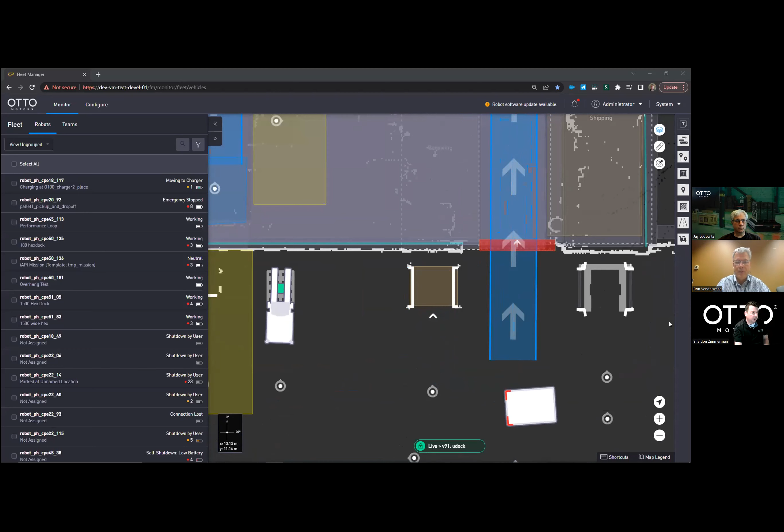It can also interlock with doors within a facility. So if you had a door, we can create what you just saw, the robot stop - we create a red stop sign for the robot. It stops, and it can then communicate with the door and say, I'm at the stop sign, can you open the door for me? The door would open and it would proceed through. So we have those options as well. But if you do not want it to go into an area, it's a simple exclusion zone, like the one at the top of the screen.

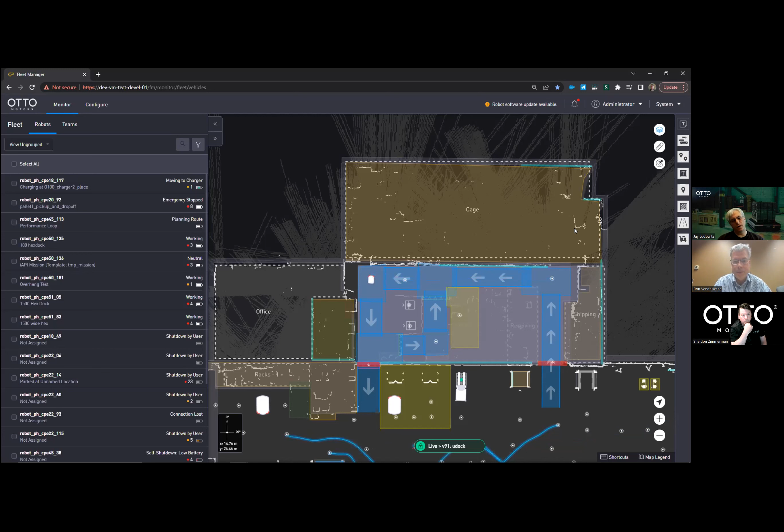And as I understand it, as your robots are moving around a new facility, it's gathering information and mapping that facility as it moves, storing that information for future decision making, correct? Yes, the technology is called simultaneous localization and mapping, which is what the LiDAR is doing. It's looking at the obstacles it sees in the environment and mapping that onto its understanding of the map, so it knows where it is.

In terms of whether it is remapping, there's a special zone we call a remapping zone, where it says, hey, this place you're going to go into is constantly changing, please update your personal map as you go through it. Kind of an advanced feature, but necessary.

You mentioned warehousing before - sometimes the pallet layouts are totally different. The walls are the same and the poles are the same, but the pallets can be all over. So the robot would slow down, and if you put a remapping zone over that, it would slow down, be a little more careful, update its map. Then if it came through again and not a lot changed, it would go faster the next time through. So we have that remapping zone feature for very high change dynamic environments.